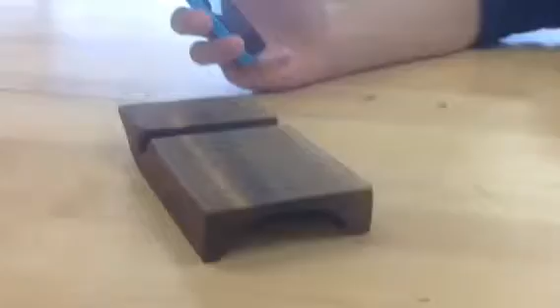All right, I'm here with Peng Zhou, who is the creator of an amplifier for cell phones. He saw a version of it made out of wood and decided to make it here at Design Lab High School using a 3D printer.

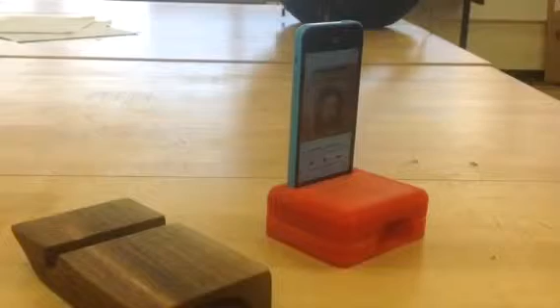So Peng, we're looking at your creation here along with the amplifier that I originally created. What made you want to make this? I really wanted to put my hands in SolidWorks and get more experience from it. Okay, and SolidWorks is a program that you found how? I found it through my mentors who used to create their robots.

So this is from our local community college, Cuyahoga Community College, Tri-C, and you're involved with the robotics program there. And SolidWorks is what they use, so you used it as well. This is just practice.

Now, when we were talking about this, you said that your design went through a couple phases. Run me through how you started, where it went wrong, what you learned from it going wrong, and how you fixed it. So I started with a design like this, but I figured out that it wasn't going to work as well in a 3D printer as this design. This design, I could slice it in half and print one part at a time and put it together.

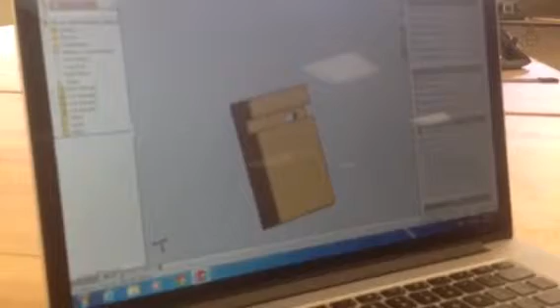Okay, so this is a picture of the first design for the printer. This is the one that didn't work because it couldn't make that dome shape in the cavern, right? Yeah, I couldn't get the 3D printer to print this curve right here in the sound chamber, because the plastic would just fall off.

And one of the things that you showed me earlier was you were talking about working in plastic and what that meant for the 3D printing process and how that would affect the sound. Could you talk to me a little bit about that? So for my first design, I had a 30% infill for the 3D print, but it turns out that the sound doesn't amplify as much as if you had it at 100% infill.

I noticed in the sound hole here, the wood one has this very open hole, and yours has this support in there. Is that for acoustic purposes, or is that for support purposes? Why does yours have that two-part chamber?

So this thing right here, it's for support for the 3D printer, so it doesn't have to print the overhang, like the cave shape. There's a cave, it's there for support. Yeah, this was the second version.

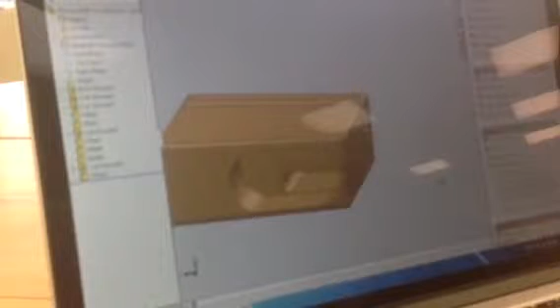Okay, and what did you do here differently, and why did you do it? I tried to have it in a cylinder shape, or oval, instead of the old design. But thinking about it, it wouldn't be possible for the 3D printer to do this.

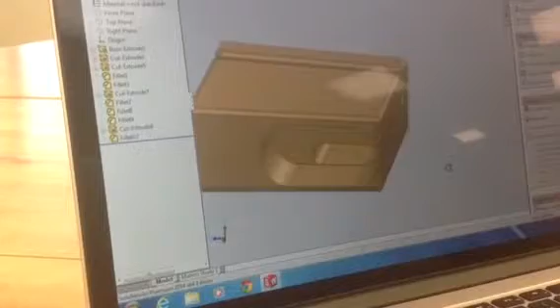Did you hit print on this, or did you just know ahead of time that it wasn't going to work? Yeah, no, I knew ahead of time. So you didn't have to waste any plastic on that. Nope. So this is design 2, and now can you show me the final and working design?

Final design. This one. Oh, this is the final design. All right, can you tilt it so we can see that chamber again?

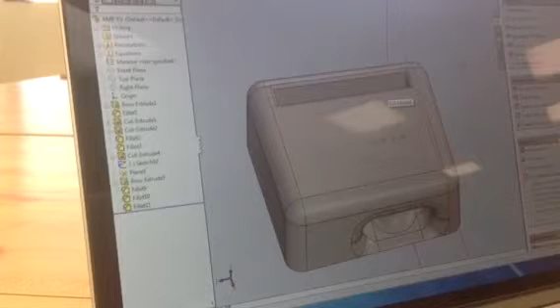So you can make smaller holes, but not the bigger ones. Yeah, the 3D printer can do some of this, but if it's a large overhang, it won't do it. And how did you learn that, by doing it or by reading about it? By experience from the past.

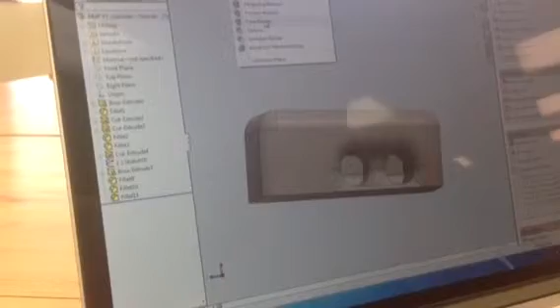Okay, so you learned a lot of this through numerous things, right? You designed several other things? No, this is my second thing. This is your second ever design. What was your first design? I just had some free time and I made a snowman.

Could you talk to me about how you felt about the failures that you had? Was it frustrating? Did you learn something and add new knowledge to that? Yeah, it was pretty frustrating when I couldn't get this design to work because the 3D printer wouldn't print it. So I knew I had to redesign it so the printer could print the design I wanted.

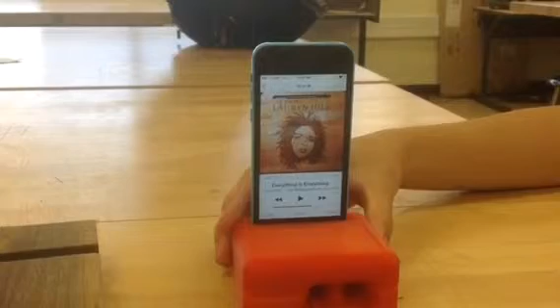Now, a lot of people quit when they fail. What makes you different? I really wanted to make something that actually works. And does it work? You feel good about how it turned out? Yeah, I feel really good. I didn't expect it to turn out like this.

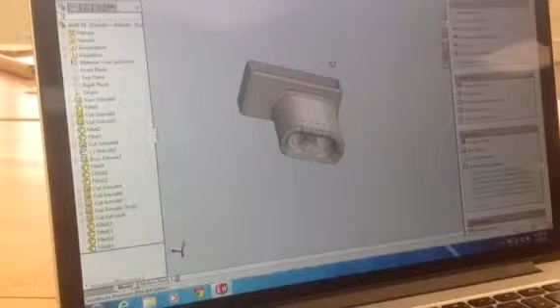So Peng, this is the fourth design, which is one you haven't printed yet, but you've done a new design of this. Can you tell me a little bit about why you did it and what this features? So the reason I made the design is so the printer would use less plastic to print the old design. I also widened this hole right here so many other phones can fit in there.

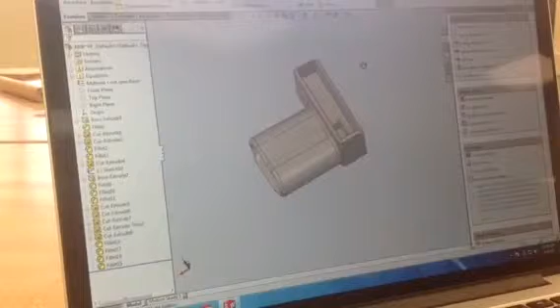Okay, what do you think this will do to the sound? What is your hypothesis? Will it sound the same? Will it sound different? It will amplify the sound more.